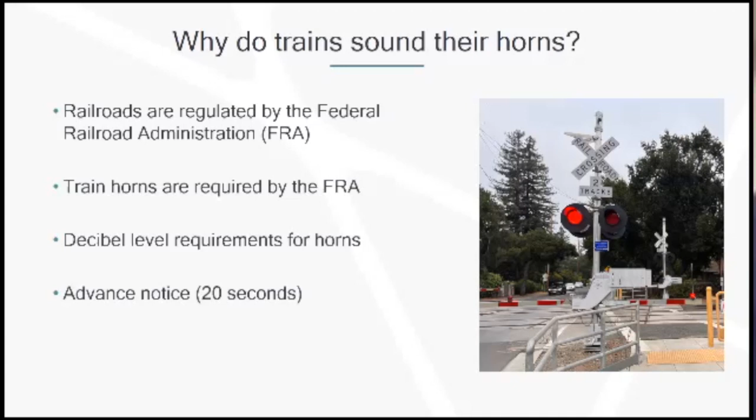So that's what's required. The decibel level requirements, advanced notice, that's the essence of the horn blowing rule. And if you want to get an exception from that, then you apply for a quiet zone under the train horn rule. Next slide.

So the quiet zone means that the engineer is not required to sound the horn. Now, does that mean that a horn will never be used? No, because every engineer, if they see something ahead, they're going to blow that horn. If they're concerned about safety, they're going to blow the horn. And with trains and train engineers, orange is the warning color. So if they see construction fence, orange fence, the horn's going to blow. If they see anything, if it's an exception, the horn is going to blow. But if there's no exceptions and it's a quiet zone, then they don't sound the horn.

And the way it's done is there's a thing called a whistle post, which is by the side of the track, and it says, hey, engineer, you're supposed to pull the cord at this point. So when you have a quiet zone, it says no train horn, so they don't blow the horn. And the idea is that mitigations, safety improvements at the crossings would be put in.

So what the FRA did was they crunched data from all across the country about collision frequencies with and without train horns. And they determined mathematically that if you make safety improvements, the risk without the horn, but with the treatments, is safer than with the horn and without the treatments. So that's the basic concept.

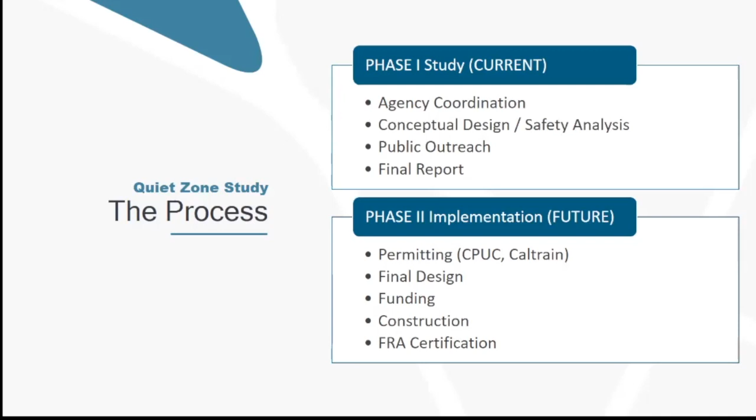All right, take it away, Peter. So I'll just briefly go through the ins and outs of the corridor itself and the specific intersections. So we're looking at essentially 5 intersections: Encinal, Glenwood, Oak Grove, Ravenswood in Menlo Park, and then in Palo Alto, the Palo Alto Avenue / Alma Street crossing. It's about 1.5 miles in total. So next slide.

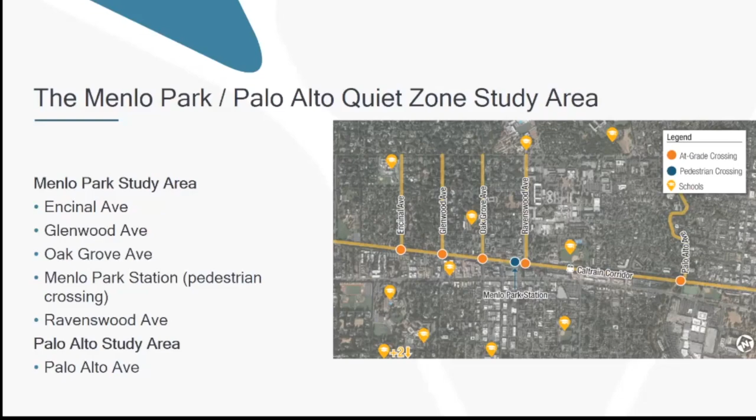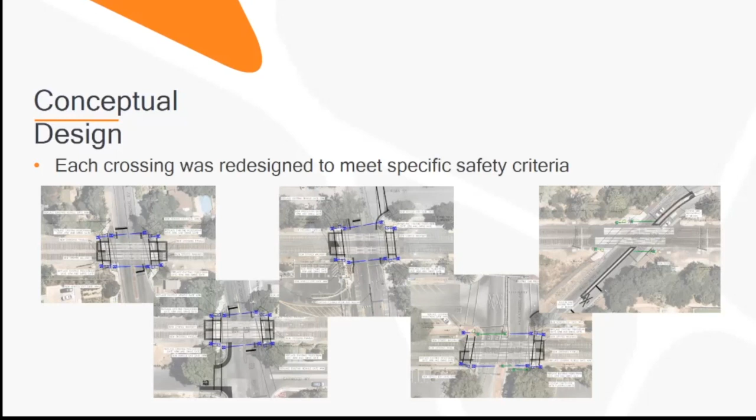And so each of these crossings were individually designed, but as Brent said, roughly, the 4 in Menlo Park would all be 4 quad gate systems. So exit gates would be installed at all of those crossings, and likely even the existing ones would be removed and replaced just due to standard changes. The Palo Alto Alma Street one, as mentioned, has an existing median, and that would have minor modifications to basically raise the median height to 8 inches to be acceptable for CPUC and FRA standards. Next slide.

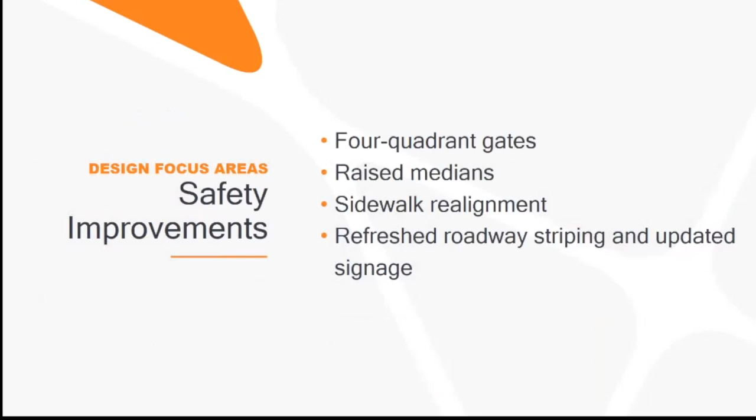So again, the different safety improvements that are typically utilized to qualify for this quiet zone would be the 4 quad gates, raised medians, sidewalk realignments at each of the crossings, refreshed roadway striping and updated signage. So that's pretty typical. Again, 4 quad gates, I think Brent described it pretty well. That typically involves putting in new gate arms on the exiting component of these intersections.

Just one thing about the 4 quad gates, just so people understand. The way it works is the exit gate comes down later than the entry gate, because if you just went past the entry gate, you wouldn't want an exit gate coming down in your face. But there's also loops. So if anybody is on there after the exit gate has come down, the car stalls or they're not paying attention, the loops will raise the exit gate, so you don't get trapped. That's it. Thank you.

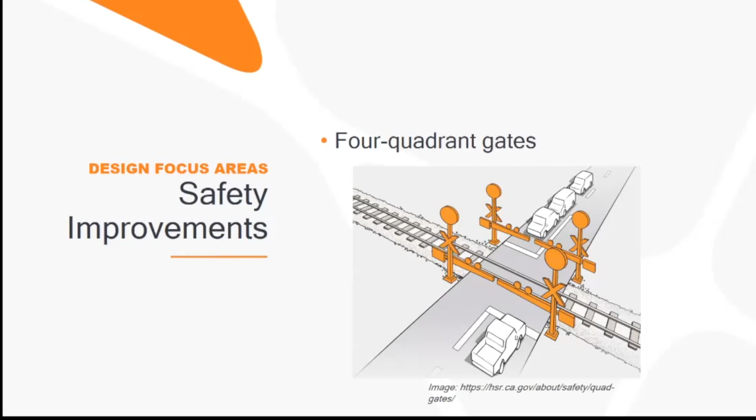Next one. Again, raised medians, as I talked about, the existing median out there today unfortunately is not 8 inches, so we'd have to raise that to 8 inches. It's relatively minor work compared to some of the other intersections, though. And that's done so that it prevents vehicles from readily trying to jump over the curb into the exit, basically. So a deterrent. Next slide.

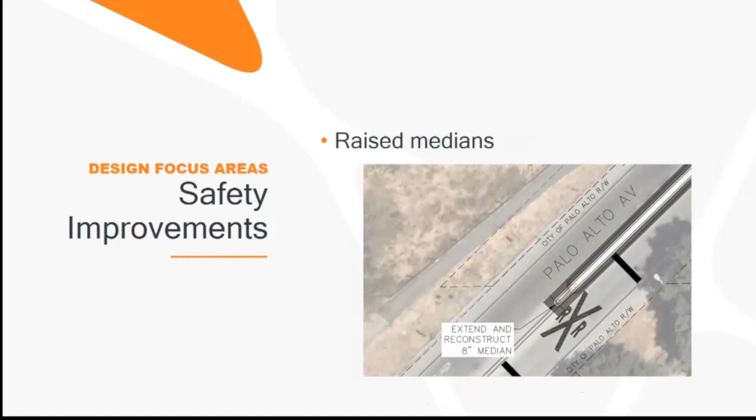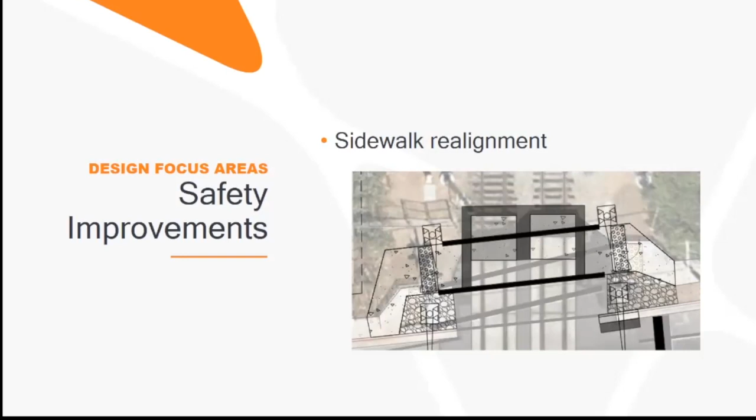Sidewalk realignments: all of our improvements in the 4 quad gate intersections would have new pedestrian gate arms and swing gates installed. This infrastructure requires space, so you have to realign the sidewalk crossings to line up with that added infrastructure. So usually it's going to be set back a little bit right behind the vehicle gates, as you can see there. Okay, next slide.

Roadway striping, that's pretty minor work, but typically that's just to update for current standards. Refresh striping that's in the pavement, pretty straightforward. Okay.

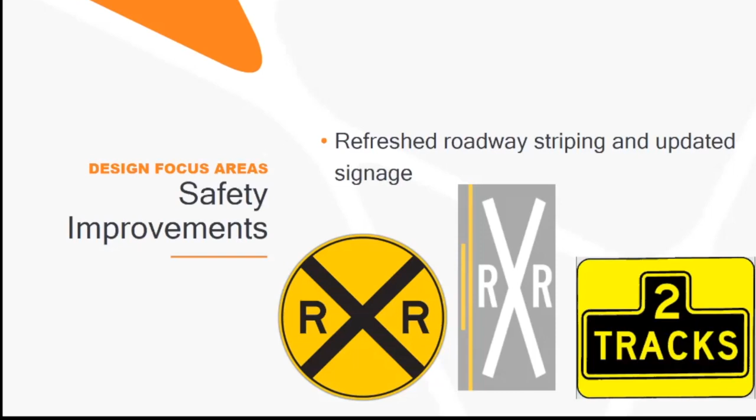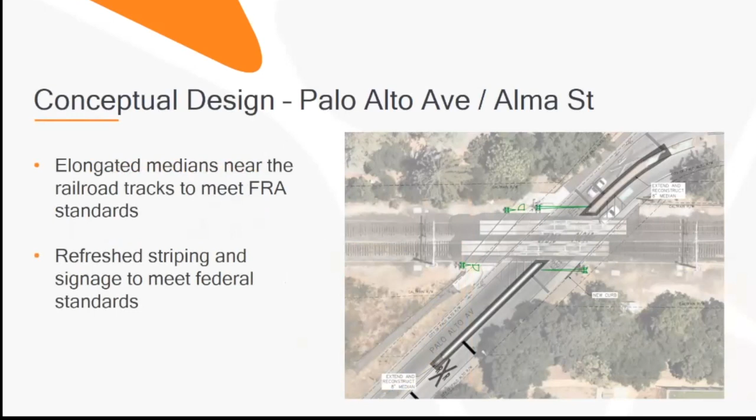So the Palo Alto Avenue Alma Street, again, we're talking extending the medians a little bit, raising them to 8 inches, some minor striping and signage. Next slide. And just for reference, you see here in green means it's existing gate arms, as you'll see on these exhibits as well. If they're in blue, that means they're proposed either to be replaced or brand new. So. Okay.

And then within City of Menlo Park, again, we're looking at 4 different intersections. Each of them would end up having the quad gate system. And I think it's important to note, as Brent talked about, the different ways of characterizing the risk assessment for this corridor. All 4 of these are not necessarily required to qualify for the quiet zone. So in fact, you could do probably just 2 crossings to qualify for quiet zone initially. Not to say that you wouldn't want to do all 4 from a safety perspective, but from the risk assessment standpoint with FRA, you could probably do a couple, I believe Ravenswood and one other one would be sufficient from a risk standpoint. And then all 4 would be a quiet zone if you did those.

Yes, they have. Yeah. That's great. Yeah. Great.

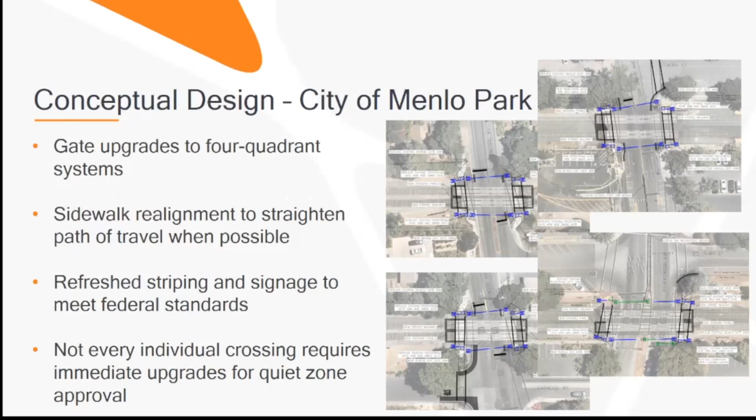Again, so another component of this is public outreach. So what we really want to solicit from you all are any questions, concerns that you might have, either about the process, about the design. We want to get input, maybe things you've observed at some of these specific intersections, driver, pedestrian behavior, things like that we'd want to address in the design, to make them as safe as possible. So. Okay.

And then, at the end of this whole process, we'll put together a final report with recommendations, including the concept designs that we have here. Brent talked about the field diagnostic meetings. We've already had those with CPUC and FRA. So these designs do reflect what CPUC and FRA would want to see at these crossings. So the next steps would be after this to go into final design for construction documents. And then of course, funding would have to be secured to go into construction.

And as Brent mentioned, CPUC has 100% control over permitting for these, but the permitting process with CPUC, since these are existing crossings, would be a GO 88-B application process. Typically, they're averaging only about a month to permit those. So it's really not that long of a process under CPUC. So, okay.